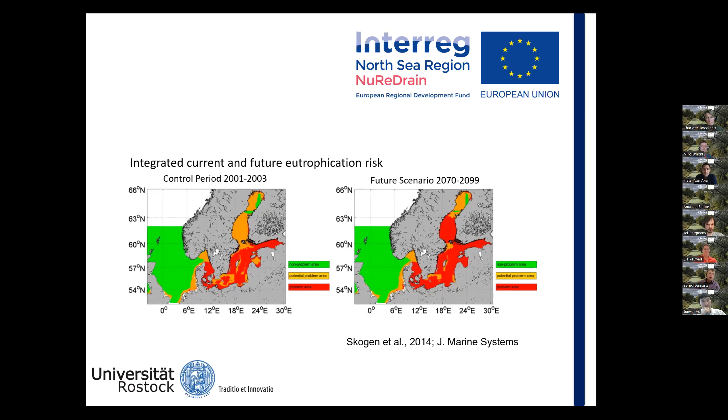And we see the current situation on the left-hand side and the future situation on the right-hand side. And for the Baltic Sea, it is very evident that we really have a huge problem throughout the Baltic Sea. And it seems that the North Sea is entirely green, so no problem, but that is not true. If we are looking along the southeastern continental coast of the North Sea, we can see it is also affected. And of course, the coastal waters are affected because the rivers bring the nutrients from the land to the oceans.

And behind this eutrophication risk is, of course, the nutrient input. We are looking here at nitrogen and phosphorus. So we have the same figure here for the North Sea coast, and we can see that along the coast we have higher concentrations of nitrogen that we have seen already in the other slide somehow.

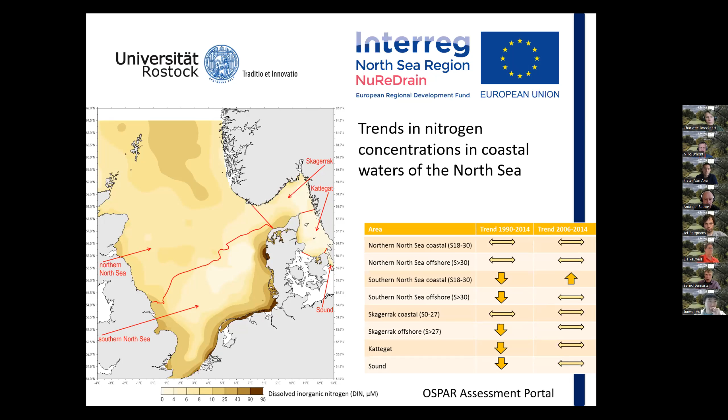Now, what is the reason that these nutrients are transported with our rivers to the coastal seas? It is, of course, the agriculture. Agriculture is here the main player. And this figure shows us the gross nitrogen balance in Europe by country. So what does that mean? What does nitrogen balance mean? It actually means the surplus of nitrogen we are applying to our agricultural fields, surplus meaning more than the plants can take for their growth. So balance is a nice word for surplus, actually.

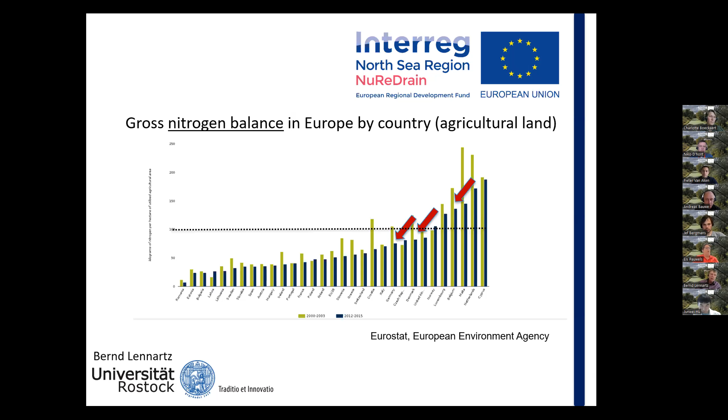And if we are concentrating here on the three countries that are actually participating in the NuReDrain project, we can see, yes, there has been somehow an improvement in this surplus, but we are still, taking the average of these three countries, in the range of 100 kilograms nitrogen per hectare and year surplus. And that is actually one of the major problems.

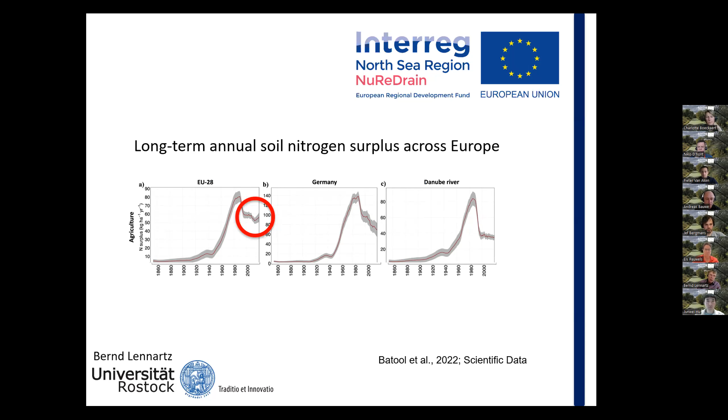The temporal development of, again, nitrogen can be seen here. Again, it's the nitrogen surplus. And we are looking at the EU member states, and we see there was a peak of the surplus, and then there was an improvement, but it seems that now we have reached a certain high plateau of this nitrogen surplus. And that is somehow also reflected in measurements in water. So what we see here is the loading of the land because of agricultural practice.

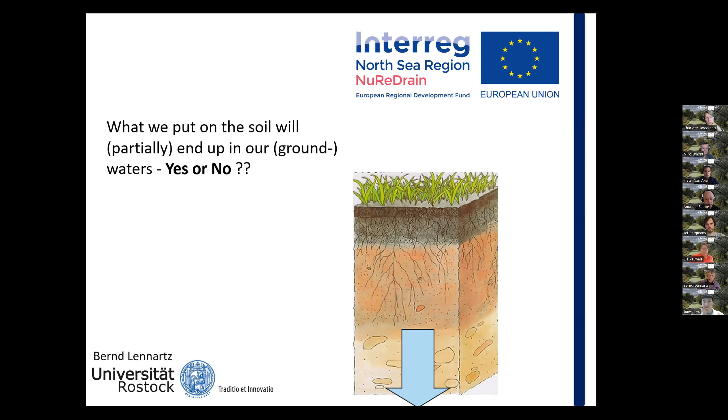So what we have seen is that there is a problem in coastal waters, but also in inland waters, of course. And the question is, will the nitrogen and the phosphorus that we put on our agricultural soils end up in our water? The question is yes or no. And the answer is yes. It's not yes or no, but it is more or less yes and no.

Yes, because, and these are results from a very recent study published in Nature Geoscience, if we relate this nitrogen surplus, here it is called net N input, with the loading of our river system, we can see clearly that there is a linear relationship, meaning the higher the surplus on our agricultural land, the more of this nutrient will pop up in our river system. So it is remarkable to note that more than a quarter of this surplus will actually end up in the rivers. So yes, we can say at least a part of this surplus will end up in water.

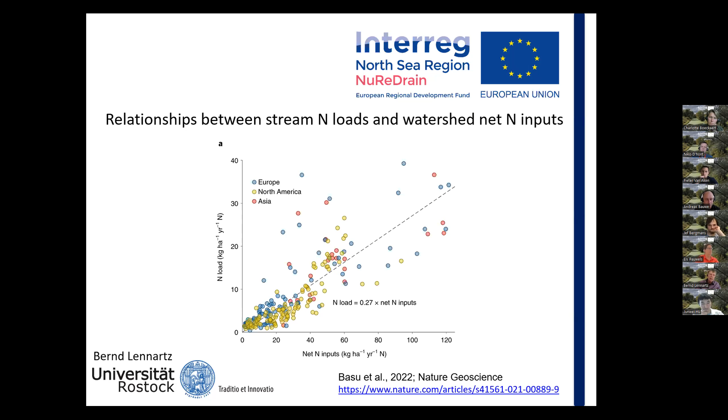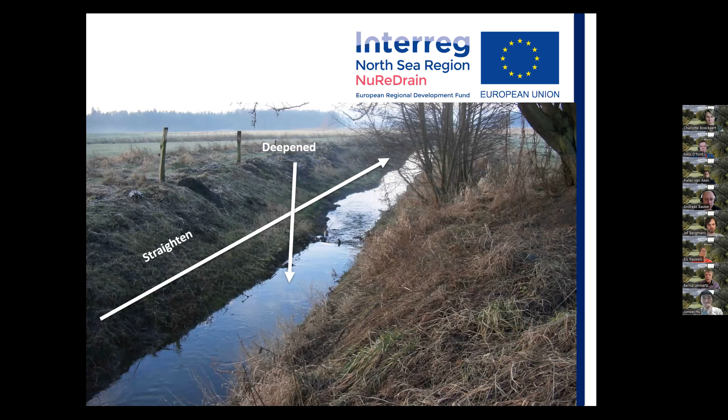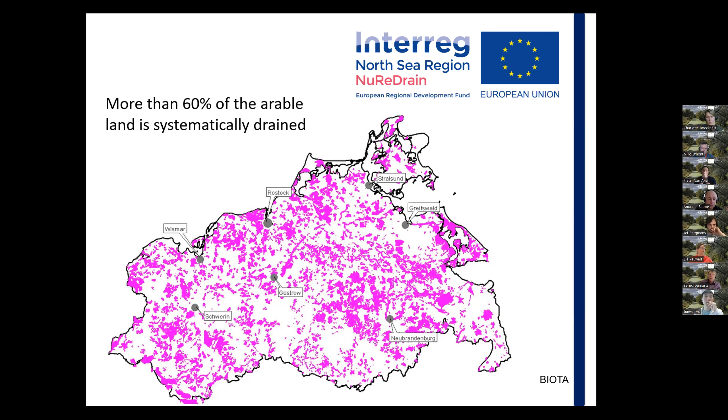And here we see our field site. So this is what we do not see in general. This is the systematic drainage system that is installed at 1 to 1.4 meters depth. And the reason for that is to lower the groundwater table, as indicated here, in order to have heavy machinery on our soil. So that is the whole reason behind it. Now let's look at what we can observe in these areas with artificial drainage, and we are looking here at a single field site.

Now we see one winter period, so this is the rainfall on top, and the blue line indicates the discharge. And especially later in the winter or in early spring, what we can see is that every rainfall event causes a discharge event. That is, of course, something we would expect. And there is a direct reaction. Immediately after rainfall, discharge is generated.

But what we would not expect is the nitrate concentration, also shown. You can see the nitrate concentration is highly dynamic and it follows the discharge curve. And that is not what we would expect, because if there is high discharge, meaning a high volume of water, I would assume that a compound is diluted, but the opposite is true. It comes more the stronger the flux. And that is also something we need to consider, and we will see what the impact of this situation is.

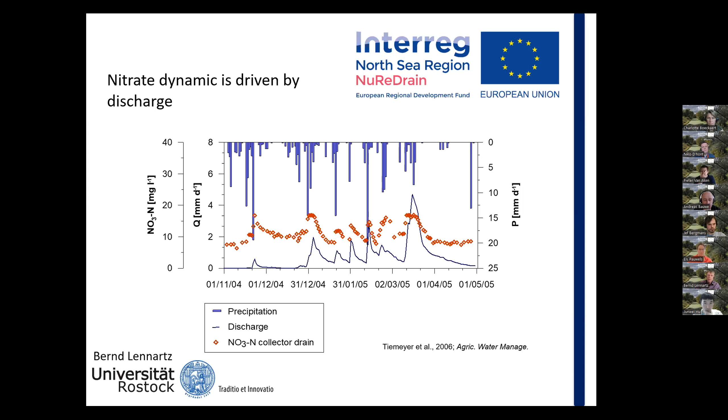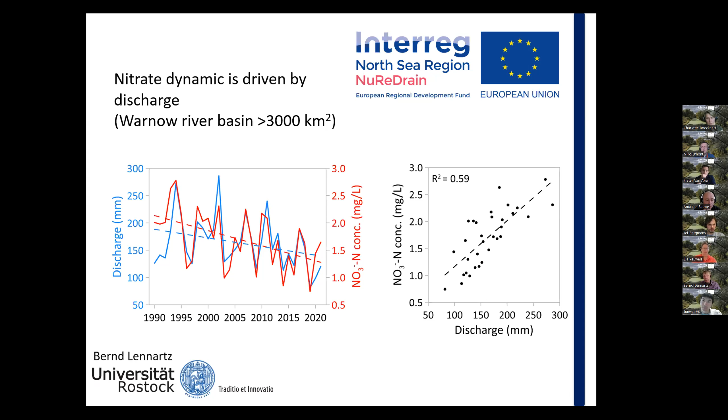We have been observing this for more than 25 years on our field site at a single drain field. Here you can see the annual development at larger scales and also at a very large scale. So that is the river basin of the Warnow River, and the surface area we are looking at is more than 3,000 square kilometers. And you can see that this relation is also true for this river basin. There is a strong correlation between discharge intensity and nitrate concentration. So that is also something we need to look at and consider.

Right, now this is also a very important study because it shows, for the example of the federal state of Mecklenburg-Western Pomerania, what are the dominant pathways for the nutrients. For nitrogen, there is no discussion. It is the artificial drainage system, indicated by the red bar here, which is the dominant pathway. So if we want to do something, let's start at the artificial drainage system.

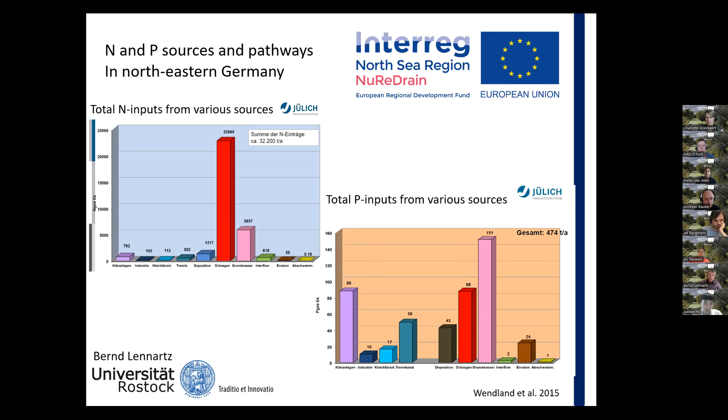Now, climate change, as I mentioned, is also somehow playing into our cards, we can say. We just recently analyzed the data for the Warnow River Basin, and what we found is, yes, there is an increase in mean annual temperature, and more or less no change in rainfall. And if we are looking at the load of the river, we see a decreasing trend in this load, as seen by this red line and the red curve here. But it seems that the only reason behind it is that we have less discharge, because the load is the product of the concentration and the volume flux of water. So if we have less water, we will have a lower nitrogen load.

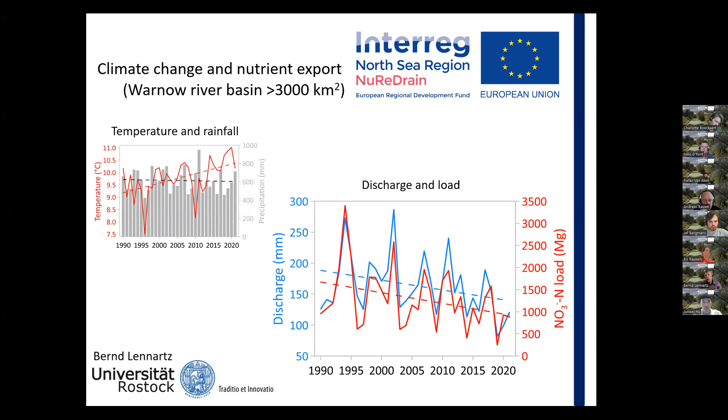So, ladies and gentlemen, what can we do? In a landscape that is artificially drained, we have actually three options. We can lower the input of our nutrients into the system by reducing the surplus. Yes, I think that is something we have to do. We saw the figure. Only if we are reducing the surplus will we have an effect in our water, but that may take a very long time.

On the other hand, we can do two things. We reduce the flux, we reduce the discharge. You may ask, how can we reduce the discharge? Well, in a landscape that is artificially drained, we have access to these pipes, and we can have regulating units, and thereby we can regulate the discharge. In times of global climate change and high temperatures, that will also come into focus, because we can hold the water in our landscapes if we are regulating these drainage systems.

And the third option is we lower the concentration of the compound we are looking at. So numbers 2 and 3 are so-called end-of-pipe solutions. And these end-of-pipe solutions have been developed in the NuReDrain project, and this is what we are going to hear about. And this is something we need to do if we want to have an instant effect.

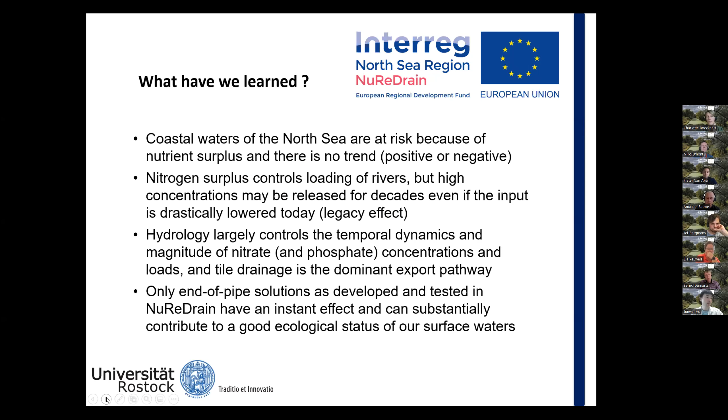And now we give the word to Pieter van Aken from KU Leuven. Thank you, Bernd. Hello, everybody. I am indeed Pieter van Aken from the Process and Environmental Technology Lab at KU Leuven. And I have the honor to introduce you into the different end-of-pipe technologies we applied in the NuReDrain project to remove nitrates from drainage water.

And before we start looking at those technologies or those systems, I want to first highlight a little bit about the different water flows that we need to consider. We had a nice introduction of Bernd about the tile drained fields or the artificial drainage systems. That's of course the first type of water, the drainage water, in which the concentrations vary between 12 and 50 milligrams nitrogen per liter.

We have most of the time variable flow rates, and sometimes even really high flow rates that we need to treat. And because there's a link with the precipitation, of course, it's only during the winter. So from November until April, the water will come out of the drainage system. So that's only a part of the year that we need to treat that water.

Also, because of the winter conditions, the water temperature will be relatively low. We measured minimum water temperatures of around 5 degrees, sometimes a little bit higher, 6-7 degrees. But even then, our technologies need to work, of course. And mostly we are at remote places, so electricity is not always available, which we need to take into account if we need to design a system to treat the water.

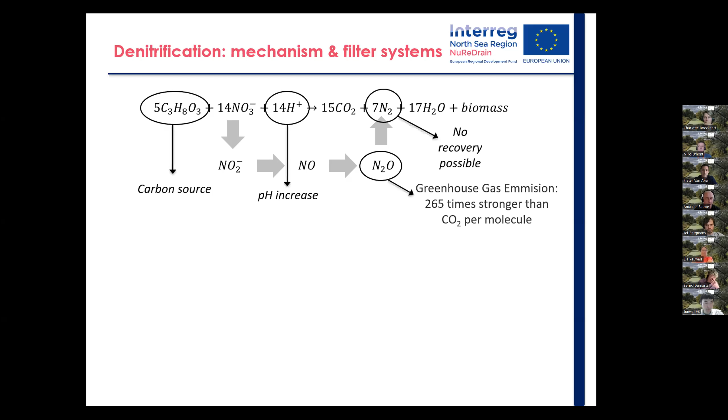Which are the different technologies that we have applied? First of all, a constructed wetland. The second is a wood chip bioreactor, and at last a moving bed biofilm reactor. For the constructed wetland and the wood chip bioreactor, at the beginning of the project there was already some experience in Denmark. They showed removal efficiencies for constructed wetland around 25%, for wood chip bioreactor around 50%. And of course, you want to make sure that we can reach those removal efficiencies or even improve them. The moving bed biofilm reactor was a new system that we developed specifically for areas where there's not a lot of space available to install such big systems like a constructed wetland or a wood chip bioreactor. For those footprints, I will give some numbers later in the presentation.

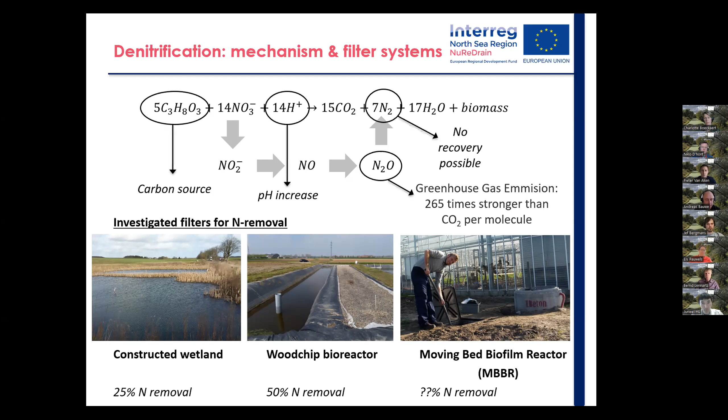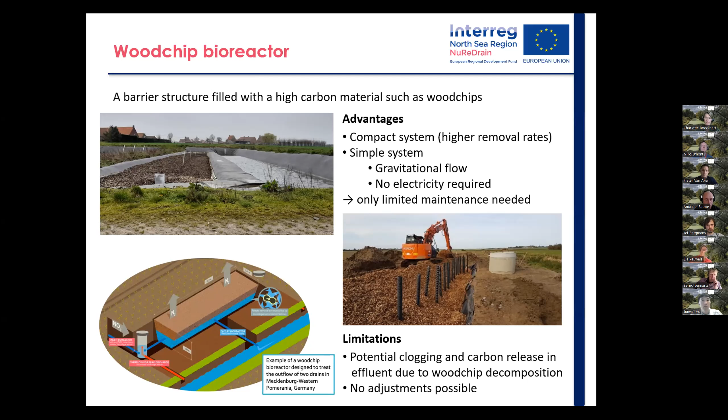If we look at a wood chip bioreactor, it's a barrier structure, and it's used to lower the footprint. We use wood chips, which will decompose and can be used as carbon source. So that's the advantage: we can reach higher removal rates, and therefore the footprint is much lower. But it still is a really simple system. And what are the limitations? Sometimes because of the decomposition of the wood chips, clogging can occur. And also there is a little bit of carbon release, so you see a slightly higher carbon concentration in the effluent.

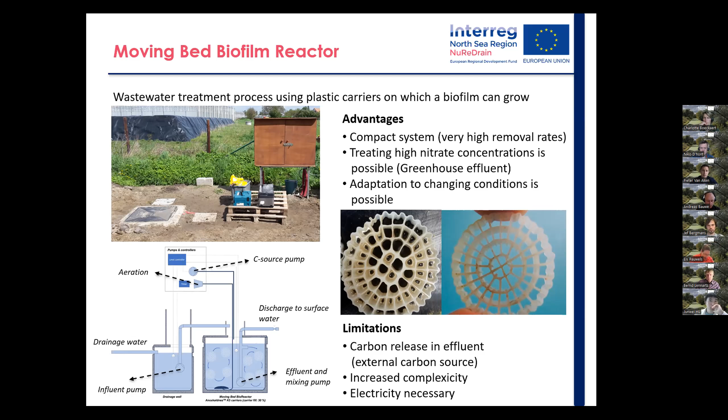Which are the limitations? We also have some carbon release in the effluent because we use an external carbon source. There is an increase of complexity, of course, as it's an engineered system, and we also need electricity for the pumps and the control and everything.

Which lessons have we learned from all the field cases? First, from the development of the moving bed biofilm reactor, we were able to keep higher temperatures in the underground systems compared to the systems above ground, and that's most important in the winter. In the above ground systems, sometimes we reach temperatures of 2 or 3 degrees, which is too low for denitrification. So there it was really difficult to have some activity. So we prefer to go underground.

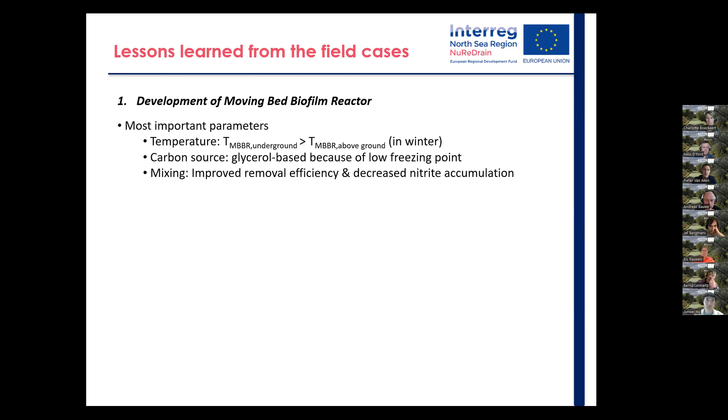For the operating costs, I show you some data from a system in Belgium. It's an underground MBBR of 15 cubic meters, and we followed it up for 3 drainage seasons. You see that the total treated drainage water, so the flow rate per day, is quite the same. It's a little bit lower in the last year, but it's quite the same, and we were able to remove quite the same amount of nitrogen.

But when we look at the nitrogen efficiency, we see an increase every year, despite the fact that we lowered the amount of carbon source that we added. So the first year, we added 8.2 kilograms carbon per kilogram of nitrogen removed, but we lowered it by almost 50%. And we didn't see anything happening on the removal efficiency, and it even increased.

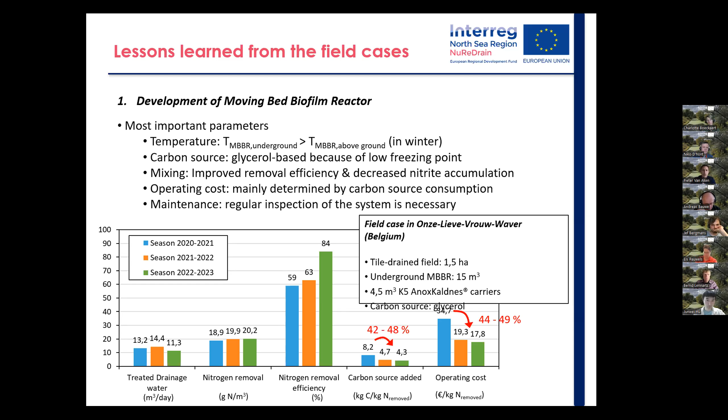So that's of course important, that we see some changes during the years, and our biofilm is developing, becoming more mature, so able to remove more nitrogen, even at lower amounts of carbon source, and that has a huge effect on the operating costs. So it's also almost 50% lowering of the operating costs. And also for maintenance, we noticed that regular inspection is necessary. So when we make a cost calculation, we consider the labor, or the amount of hours that's necessary.

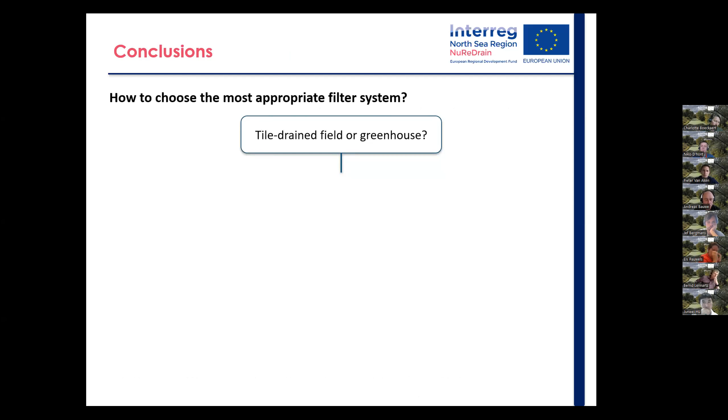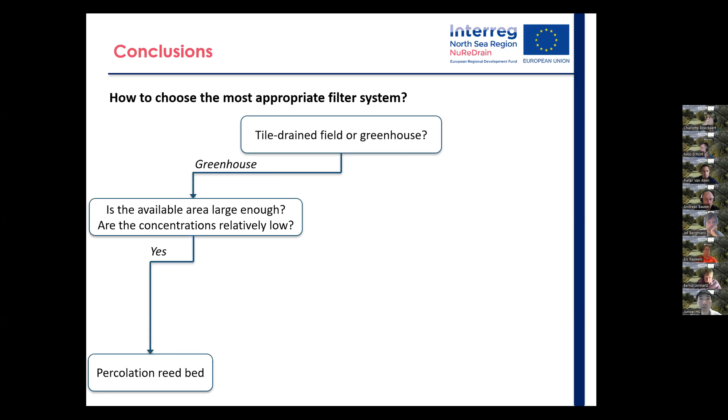To come to a conclusion, I try to come up with a decision tree. You don't need to take it absolutely, but it gives a direction when to use which system in which situation. First of all, is it a tile drained field or is it a greenhouse? If you go for a greenhouse, is the available area large enough, or are the concentrations relatively low? Then a percolation reed bed can of course be used. I don't show any results of that, but we also investigated that in the NuReDrain project. So we have some results available. If it's not, we will advise you to use an MBBR.

If it's a tile drained field and you have quite a lot of area available, you can go for a constructed wetland or a wood chip bioreactor. Is there a restriction of the amount of area available? Then consider to go off-grid or not. Is it possible to use electricity or not? If no electricity is available, if you're at a remote location, use the wood chip bioreactor. Can you use electricity? Then go for an MBBR, of course.

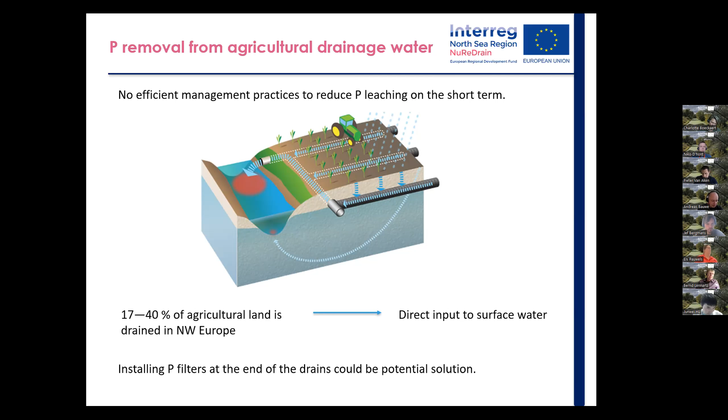So, for this purpose, we developed a filter to adsorb the phosphorus. In the lab, we tested different filter materials, and we found the iron coated sand showed the highest capacity of removing phosphorus. This is because the iron could form a chemical bond with phosphorus. And the iron coated sand is a waste product from the water industry. So it also caused no other contaminations.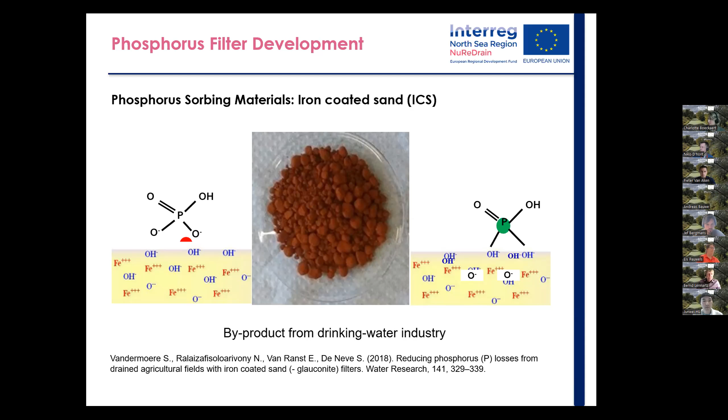So using this material, we developed a phosphorus filter. The drainage water goes inside the filter box, first goes down and then moves upwards, has contact with the iron coated sand and then is discharged. When the flow is higher than the capacity of the filter box, the water could be directly discharged.

We installed several of these prototype filter boxes in the field, and we evaluated the performance for the long term. Let's have a look at the results. So at the site of Zethem, we have 3 filters there, and now I will show 2 of them. One filter has been installed for 5 years. From this table, we see the phosphorus removal efficiency.

The y-axis indicates the volume-weighted phosphorus concentration, and the dark blue bar indicates the total phosphorus at the inlet, and the light blue bar indicates the total phosphorus at the outlet. And the dark green indicates the dissolved reactive phosphorus at the inlet, and the light green indicates the dissolved reactive phosphorus at the outlet.

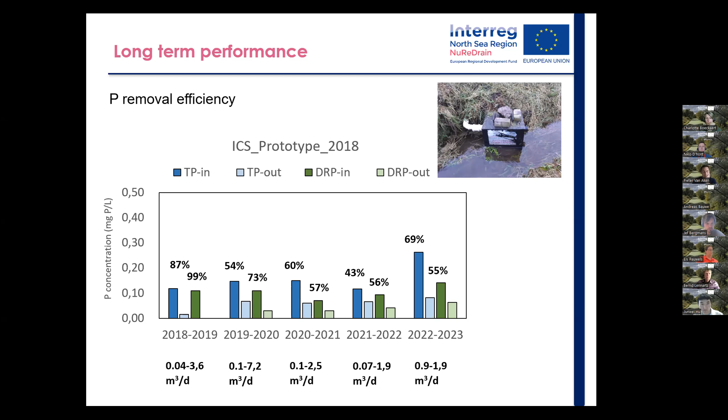And this is also the case for the other filter we tested for 4 years, also at Zethem. So in the first year, almost all the phosphate was removed, and still in the 5th and the 4th year, more than 50% of the phosphate can be removed.

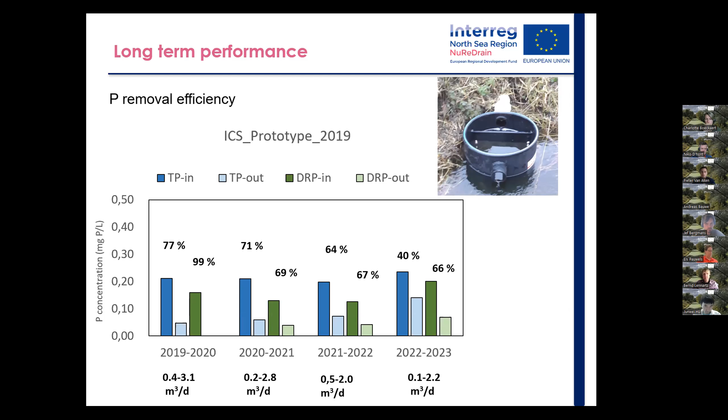So generally, we can say if the flow is below 0.2 cubic meters per hour, which is 4.8 cubic meters per day, we could achieve a relatively high phosphorus efficiency, around 50%. Currently, the filter box is placed in the ditch, but ideally the ditch should not be obstructed. So we further tested burying the filter box at the edge of the field inside the soil. And we did 2 of them. Both are at that site, and the installation proved to be relatively easy.

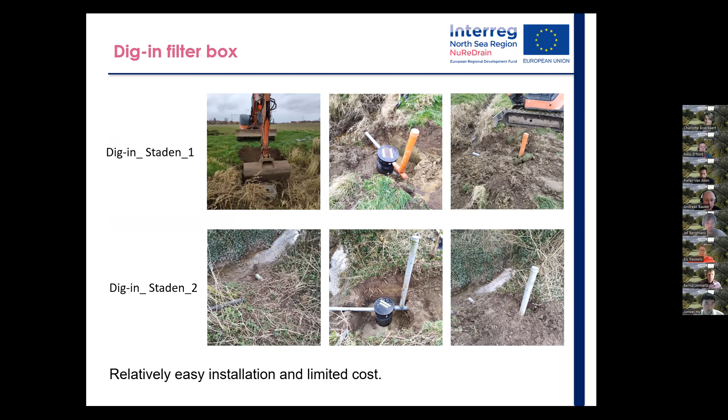How about the performance? Because in the first year, both filters showed very low phosphorus concentration, we did not show the data. At one of the filters in the second year, the phosphorus concentration was high, and we only looked at data with a flow rate lower than 4.8 cubic meters per day. At this flow rate, the phosphorus filter showed around 50% removal efficiency for the dissolved reactive phosphorus.

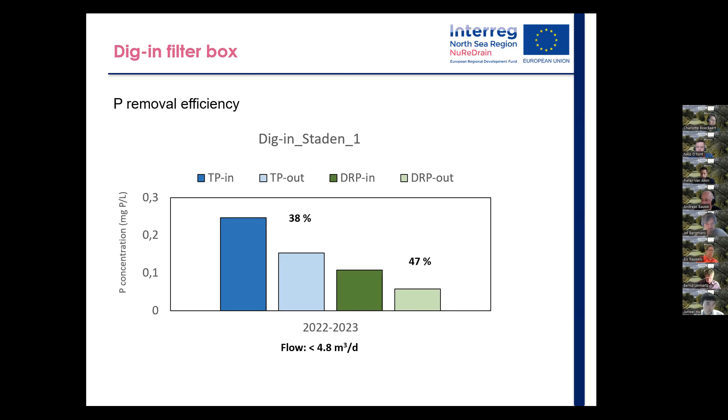As we can see from the previous graph about the flow and the removal efficiency, our filter cannot treat bigger volumes of drainage water. So to achieve this, we designed another upscaled filter box. This filter box has two cylinder elements. In between them, 140 liters of iron coated sand was filled. And this filter element is placed in a cubic container.

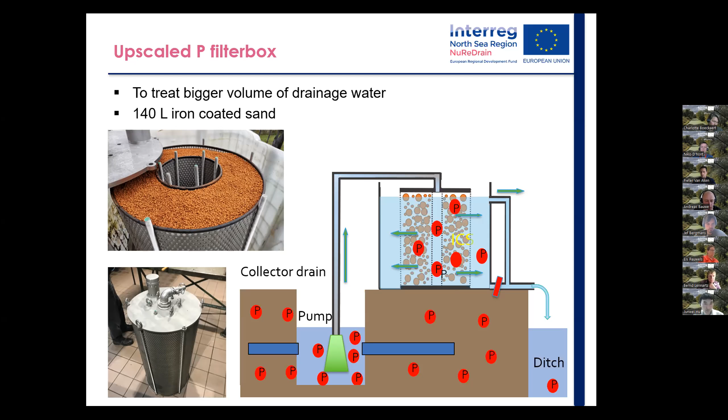How does this filter work? First, the water is pumped to the center of the filter elements, and then it goes from inside to outside, through the iron coated sand, enters the cubic container, and then is discharged to the ditch. We have two of these upscaled filter boxes installed, one at a collector drain at the Belgian coast in Middelkerke, and the other one at the open pond of Inagro. We tested these filters for 2 drainage seasons.

The first year at Inagro, the phosphorus concentration was low, but the second year, the phosphorus concentration was higher, and we managed to have a good result. So again, the dark blue is the total phosphorus at the inlet, the light blue is the total phosphorus at the outlet, the dark green is the dissolved reactive phosphorus at the inlet, the light green is the dissolved reactive phosphorus at the outlet, and the y-axis is the phosphorus concentration.

So at the average flow of 8.8 cubic meters per day, we achieved 75% dissolved reactive phosphorus removal efficiency. However, we constantly had problems with the open pond water. It's a clogging problem. So to prevent this problem, we installed a pre-filter. But still, we need frequent maintenance to ensure optimal water flow.

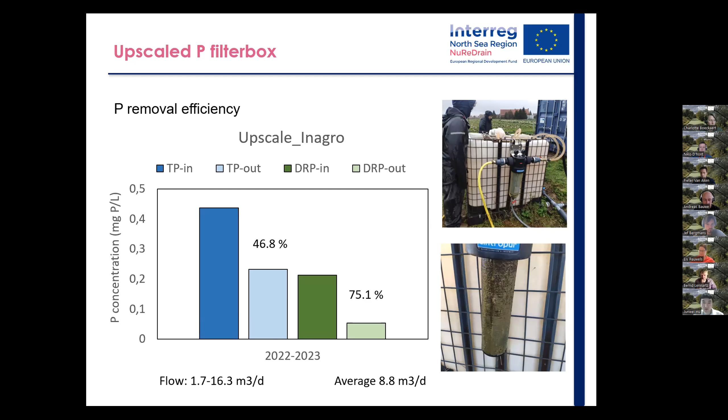However, the upscaled filter does not work so well at Middelkerke. In the first year, the phosphorus removal efficiency was around 20%. We further improved this filter to reduce the flow and to make sure all the elements are used. But still, the phosphorus removal efficiency did not increase in the second drainage season. We assume this could be due to the water properties, but it still needs to be confirmed by further investigation.

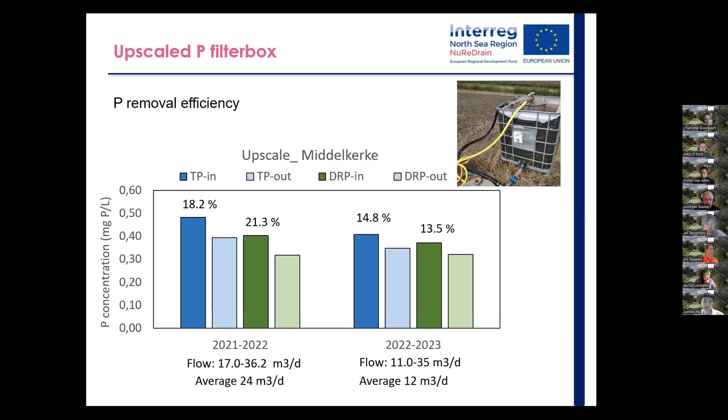In the end, we compared the cost of these two types of filter box. The small filter box is based on the 3 filters at Zetterham, tested for 3 to 5 years. On average, every year 150 cubic meters of water is treated, at an average phosphorus concentration of 0.14 ppm, with an average phosphorus removal efficiency of 72%. So every year, 14.3 grams of phosphorus is removed, and the cost for 1 kilo of phosphorus removed is 1,750 euro.

The upscaled filter box is calculated based on the upscaled filter at Middelkerke, tested for 1 year. At an average flow rate of 8.8 cubic meters per day within a drainage season of 4 months, we estimate 1,000 cubic meters of water being treated, and with an incoming phosphorus concentration of 0.21 ppm and an average phosphorus removal efficiency of 75%, we estimate 166 grams of phosphorus was absorbed. With 1 kilo of phosphorus removed, it costs 1,500 euro.

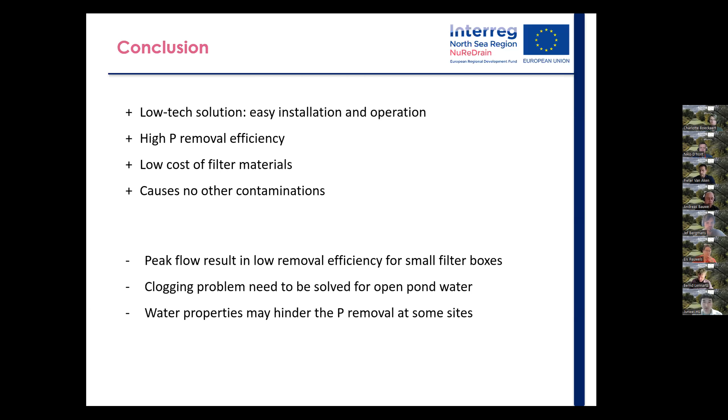That's all of my presentation. Thank you for listening. Okay, thank you, Hunwei. There is no question in between Hunwei's presentation and mine, so I continue.

My name is Els Pauwels. I'm working at the ornamental plant research here in Belgium, in Destelbergen. We learned a lot from Peter about the MBBR and N filters, and we learned already some things about the P filter from Hunwei. So what we thought is: can we install 2-in-1 filters, P and N filters together, to have a total removal of N and P? The N filters can be constructed wetlands, cocos chips filters, and MBBR, and for the P filters there were at first several possible filter materials, and the NuReDrain project helped us to find which filter is the best for which condition.

Something that is very important for growers is that they have to keep reusing as much water as possible. The water that we are treating, certainly for greenhouse growers, is only the water that is not reused, because reuse is a priority. You can save fertilizer use by 30%. And water is so important now that reusing is really a priority. But if you then have wastewater, and in greenhouses that's mostly max 5% of the total amount of water, then we have filters constructed that can lower the N and P concentrations.

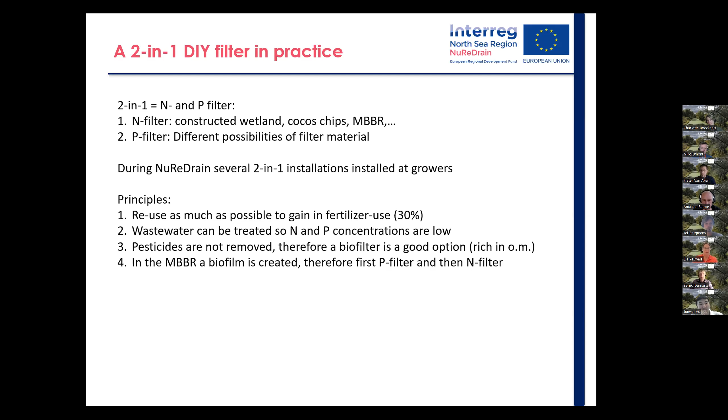So we have chosen the ICS grains, as Hunwei already said, but for that we did a lot of research. It was a team of Peter and Nico who did a lot of research on many different filter materials. Also at VITO, they tested a lot of filter materials to know which material can be used in which condition. Finally we ended up with 11 filter materials we researched, and then we narrowed them down to 4 good materials that can be used.

But indeed, ICS is very easy to use because it is a waste product from drinking water production, and it can really absorb P very well. It has the disadvantage that it desorbs less well than other materials, but it absorbs P very well, and therefore you can have a high conductivity in the filters. And until now it's sufficiently available.

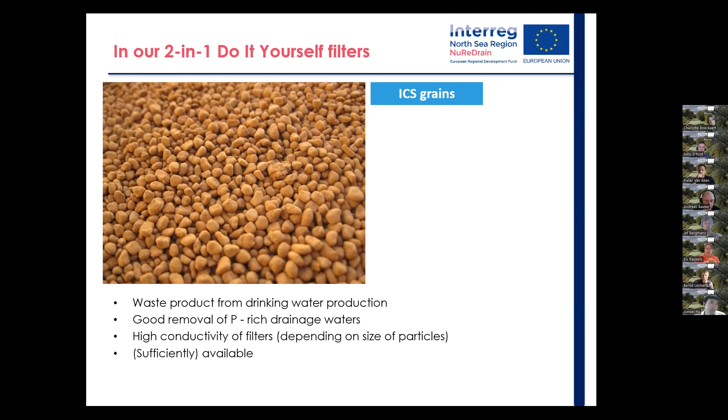But we tested also at PCS other materials. We have also the pellets. That's pellets that are made from the sludge, also from the drinking water company. But yeah, that's an extra step that they have to do with the sludge. So currently it's not available anymore, but you will see in the results that it is certainly as good as the ICS grains are. Good material, but a bit of a problem with the availability.

And then we have other materials like Vito A and Vito B that are also materials based on iron-coated sand, the Vito B on iron, and on aluminium, the Vito A. Materials that work very well, we will see it. And then later in the project, we also did tests with the regenerated ICS, which later on Jef will talk about. And you have seen the material from Hunwei, which was tested in the field.

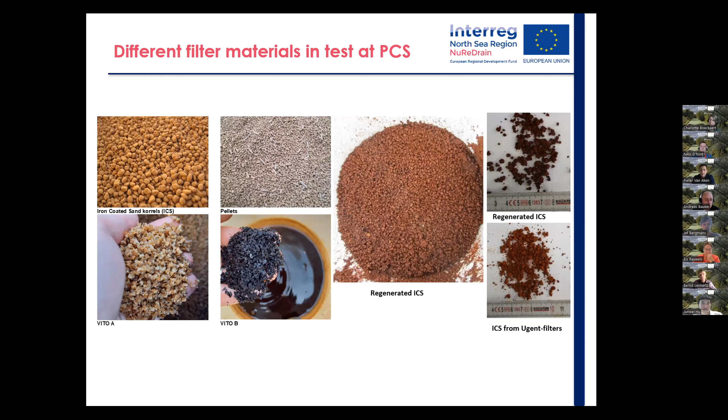For greenhouse water, we have, of course, the advantage. Yeah, it's a high load, then you have pretty good efficiency. And we don't have any problem. It's clean water from the greenhouses. We don't have any problem with clogging and so on. So these are advantages to have such a good result.

That is something that we always see in the beginning of the season. It's something funny, or not funny, but something that we see, that the P is going deeper into the grains, and there are new possibilities to absorb at the outside of the grain. So even if they were saturated last year and you let them rest some time, when you again start up your filter systems, they work again in the beginning. But of course, they are again fast saturated.

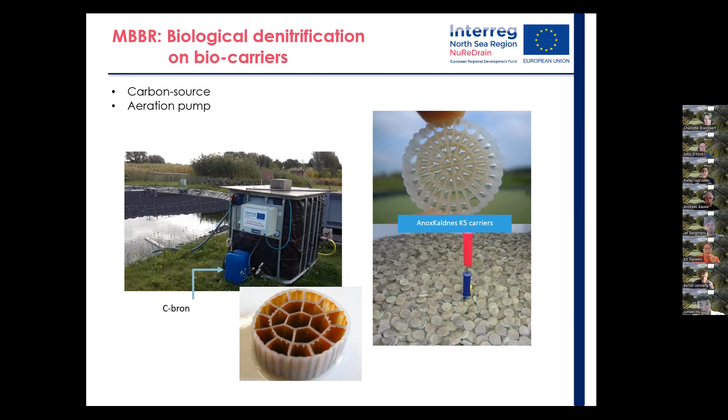So, and then we have a 2-in-1 filter. We have a P filter and a second filter. We chose for the MBBR because that's very compact and easy. Like Peter already told you, we need a carbon source for this and an aeration pump, and the carriers, but that's almost everything. So it's really easy to install. And therefore we have a demo unit that we show to the growers. And we have also demo moments where we show how it works. And we made a manual, which is available in Dutch and in English, of how you can make your own MBBR. So it's simple and compact.

How much water can we process? We process up to 3 cubic meters every day. It's robust, cheap, and there's no recovery. The carbon source, well, 5 to 8%, yes, sometimes, but on the other side, we needed to go up to 15%. So it really depends on the water that you are treating, how much carbon you have to add. So that's something that during use you still have to adapt. And the P filter always works very well in winter, but the N filter, in winter times when it's freezing, can be difficult in operation. The efficiency can be lower then.

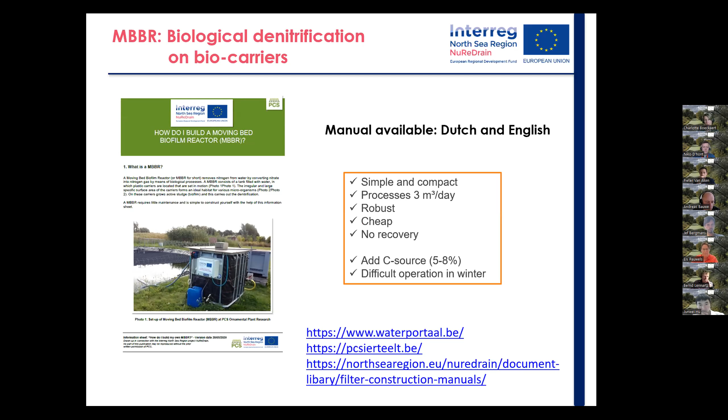So we tested different 2-in-1 filters in practice, and this is the grower that you saw in the beginning, where the winner of the quiz will receive the plants of, and he was one of the really first growers to be interested in these P and N filters.

Why specific for this grower? Because he grows potted plants that are really susceptible to a particular bacteria, and therefore reusing his water is sometimes difficult. Sometimes he has to discard his water, and he can do that on his grassland, but he can only put certain amounts of water on that grassland. And if the N and P concentration of the water is lower, then he can add more water per square meter. So first he had only a P filter, but later on also an N filter, so he can put more water per square meter.

He has a floristry with potted plants, and he has 750 cubic meters of drain water a year. At the start of the project, we first have the 2 P filters and then the MBBR filter. So also there we treat 3 cubic meters every day. And you have also an aeration pump in the MBBR, which is running 20 times a day, only 1 minute.

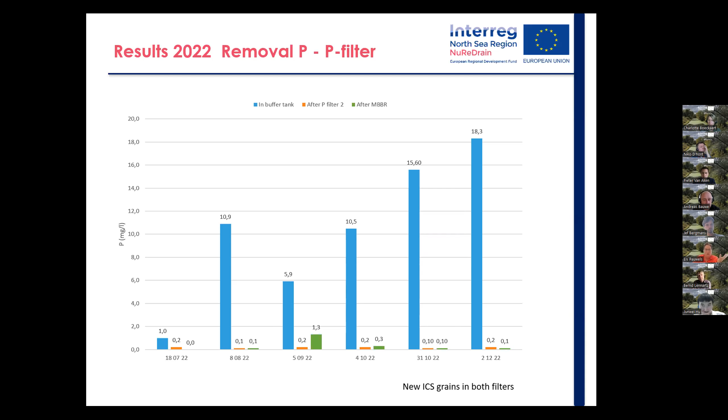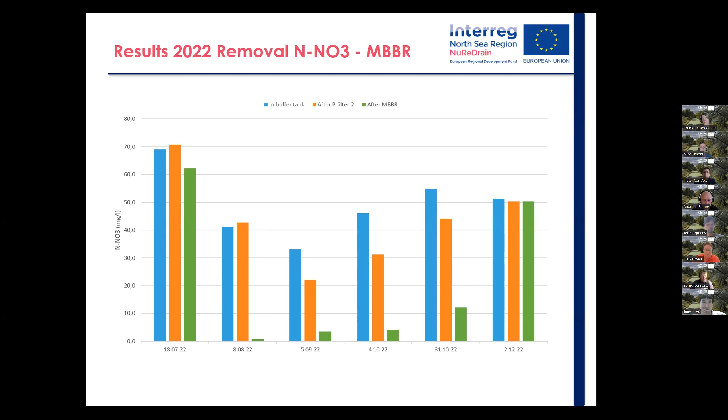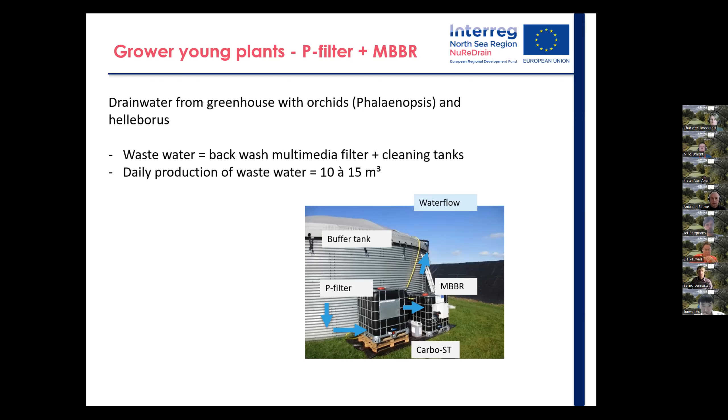And then the most recent filter that we installed is also drain water from a greenhouse with azalea. Also here, there is a UV filter to reuse all the water, but the backwash water can be pretty much. Here, for one backwash, it's 1.5 cubic meters. And if you have more than one backwash, for instance, 2 backwashes each day, then you can treat all this water with the N and P filter to be able to lower the concentrations.

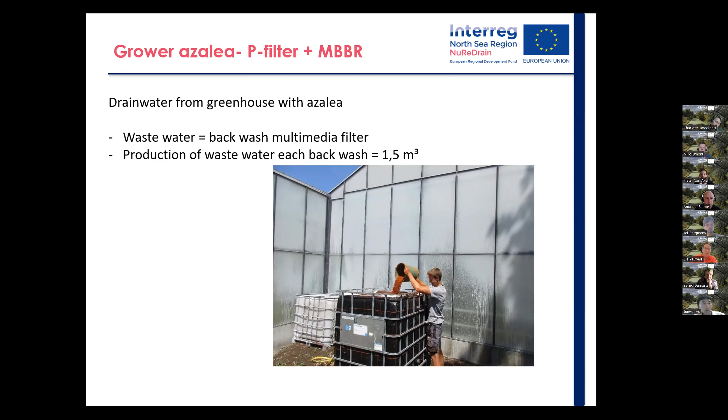So here you can see the total installation. What is the cost of a two-in-one filter? Well, let's say that the cost for the P filter is mainly pumps, the cubitainer, and nowadays, before we just received the ICS from the drinking water company, but nowadays you buy it from another company and you have to buy the ICS grains. So it comes now up to 1,000 to 1,500 euros for a P filter.

And for the MBBR, which is a little bit more complex, and you need energy there, we say it is up to 2,000, 2,500 euros. So in total, a two-in-one filter system is 3,500 up to 4,000 euros that it costs. But efficiency, certainly for the P filters here, we have really efficiency for greenhouse water, 80 to even almost 100%. The MBBR is more around 70% efficiency that we obtained.

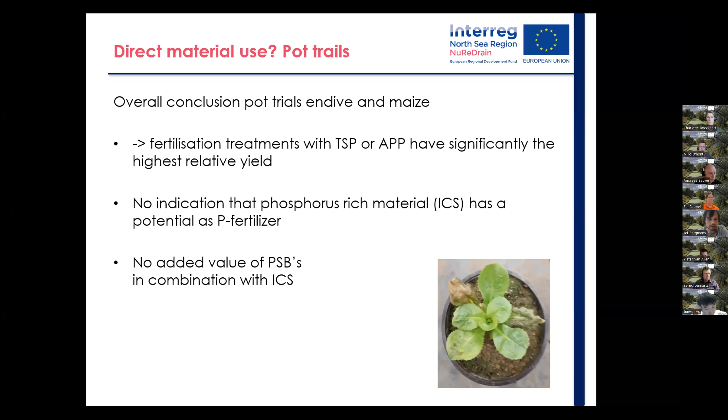And even if we use phosphorus solubilizing bacteria in combination with this loaded iron-coated sand, we still do not achieve the same as when we add a phosphate nutrient. So this route was abandoned because of not very promising results.

The other route that we were looking at then is to at least regenerate the sorbents. In literature, you see two routes to recover the phosphorus from the sorbents: there is the acidic route and an alkaline route. The difference there is mainly that in the acidic route you indeed recover more phosphorus than in the alkaline route, but the issue is that you also start dissolving a lot of the actual sorbent.

And if you look at the capacities of these sorbents, you see that only a few grams of phosphate is actually sorbed on a kilogram of sorbent. So we decided, and it's also economically more interesting, to focus on the filter material recovery, to make sure that the filter material is not completely destroyed, and to have a more selective removal.

With the alkaline route, we basically replace the sorbed phosphorus by hydroxyl groups on the surface of the iron hydroxides or oxides. There is already some literature available on this, but most literature works on very small scale experiments and tests performed on artificially loaded sorbents. We had the availability of sorbents that came from the field, and that was more interesting because there you will also see more loading on the inside of the iron-coated sand.

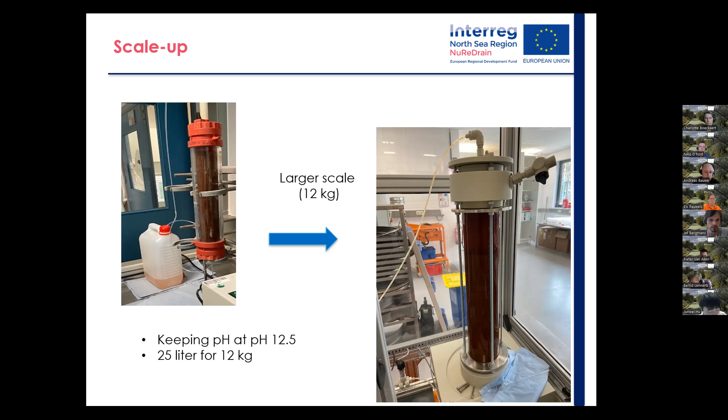Looking back at our results, we see that we can desorb phosphorus from the saturated ICS grains, and that the type of alkaline solution does not have a big influence. We used both potassium hydroxide and sodium hydroxide in the beginning, then went from sodium hydroxide to potassium hydroxide for the nutrients, and we can keep on recirculating the alkaline solution. We basically recirculate the same solution over the column and keep the pH at 12.5, adding a little bit of potassium hydroxide the longer the experiment runs.

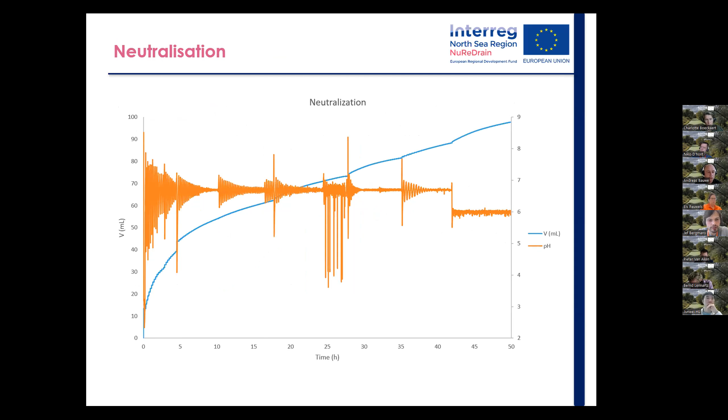We then do the opposite: afterwards, we add an acid and bring the sorbents back to neutral pH. With that, we managed to desorb 8 to 9 grams of P per kilogram of sorbent, which is basically what was sorbed before. So almost all P that was sorbed we can desorb in this process. And these are the sorbents after desorption that were sent back to PCS to reuse in a different setup.

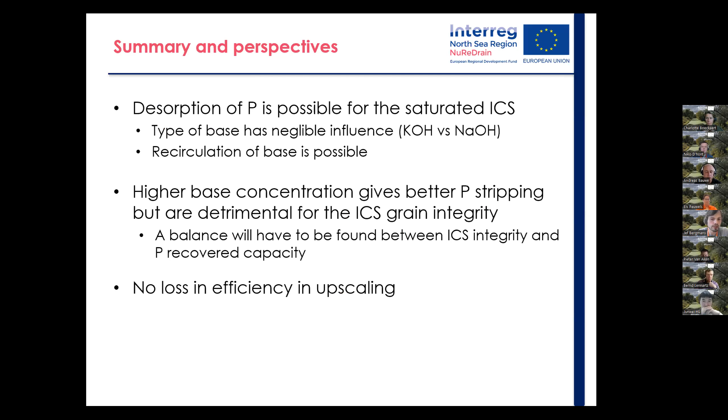If we use a higher alkaline concentration, we of course remove more P. But if we use too much and go too high in pH, we also start dissolving more iron from the surface. So we cannot go that high in pH, to make sure that the integrity of the sorbents is still there and that we can keep on reusing them. Ideally, we would have a few sorption-desorption cycles, and then it's of course important that the integrity stays stable.

Now, what we also did is we looked in the technical economical assessment what is more economically interesting, to just buy new sorbents and landfill the old ones, or to desorb them. So we assumed that there was already a sorption setup available. We assumed that the loaded sorbents would then be landfilled. That's at the moment we think the only option. Of course, if for loaded ICS or loaded other iron oxide-based sorbents you find a better solution besides landfilling, then that cost will disappear.

And then for the desorption case, you have to invest, of course, in a desorption setup. You can use the same setup that you use for the sorption column if you have used material that can withstand a high pH. If you use steel in your sorption setup, then the high pHs that we would use would cause rust. So you ideally work with material like polypropylene or PTFE and so on. You also use a peristaltic pump or a chemical pump that can again withstand the high pH. And you need a steering system, basically a pH meter and a feedback system that says, if your pH drops too low, to add extra potassium hydroxide.

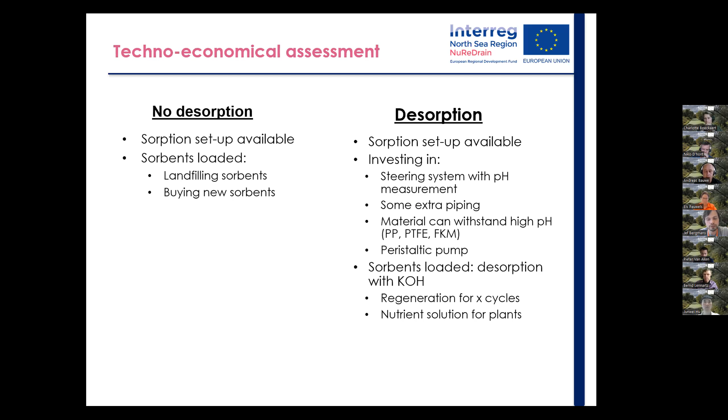Then you also need to, of course, pay for the potassium hydroxide and the sulfuric acid. And the nutrient solution that we get could be used for plants because it basically contains potassium, sulfates, and phosphates. So that's all useful nutrients. We did not take into account, however, the price of this nutrient solution. So we just assume you can use it, but we didn't give a positive value to this solution yet.

Okay, thank you, Jeff. Then we move on to our last quiz question. So if you still want to beat Marianne, be quick and be correct. It's a question asked by Marijke Dirks from PCS. I'm Marijke Dirks from PCS Ornamental Plant Research. We test two-in-one filters to remove nitrogen and phosphorus from greenhouse effluent. I have a question for you. The cost for nutrient removal depends on the concentration of nutrients in the water and the volume of water to be treated. What is the average cost, investment and operation, for a moving bed bioreactor?

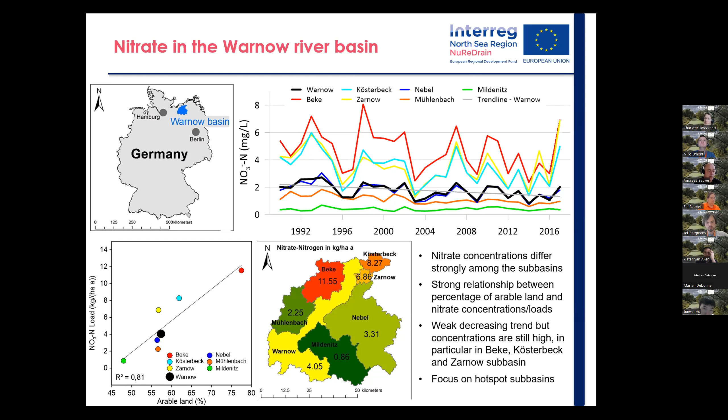What does that mean? Also, we have in the last 30 years a weak decreasing trend. But if we want to install end-of-pipe solutions, which we have heard a lot about today, then we should focus on hotspot subbasins, which is in our case in the Warnow River Basin, the Beke subcatchment.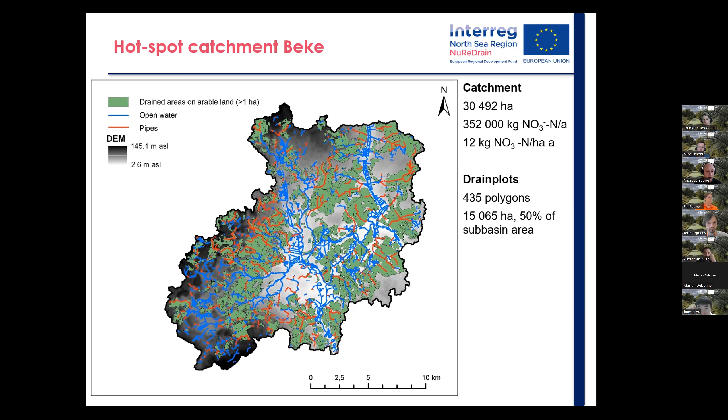So what options do we have to reduce the nitrate load with the help of technical solutions? It was already mentioned that we could install, for instance, moving bed bioreactors, or wood chip filters, or another option would be the installation of constructed wetlands. We have also heard a lot about the investment and operational costs of these different systems, and about the different efficiency of these systems.

So the main study questions here were, what is the nitrate removal potential if we would install these filters at a catchment scale, and what are the annual costs? To answer this question, we developed a cost evaluation tool, which I want to introduce right now, and I want to give you some examples of how you could work with the tool or what the results could be.

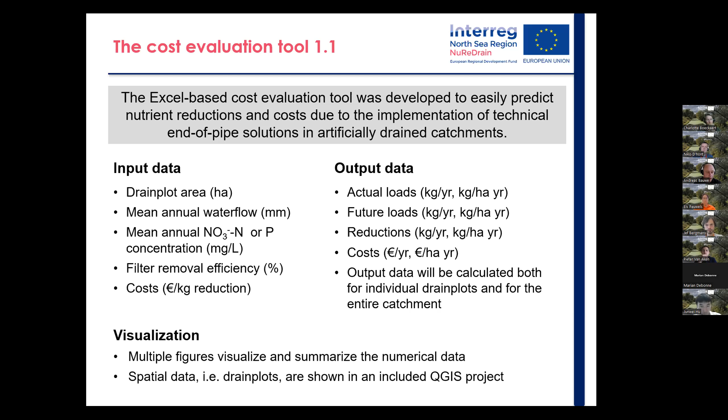Here you see a screenshot of this tool. We developed 3 different settings, and this is the so-called advanced settings, where you can define the area of the drain plots where you would like to install MBBRs or wood chip filters or surface flow constructed wetlands.

You can define a minimum annual nitrate concentration in which filters should be installed, and also you can define the costs per kilogram solute reduction for the 3 different systems, and also you can define, here it is named the reduction target, which is in fact the performance of the filter. So, and here you see some different figures, and here you see the start of the tabular data.

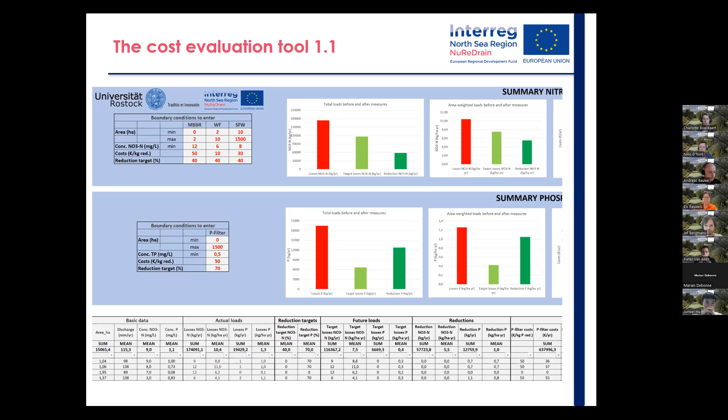So I want to come to a first example, which is related to the basic settings, if you want to start to play a little bit with the tool. So first, we should define the boundary conditions. As I already mentioned, in the Beke catchment, we have 435 drain plots, and we assume that they have the same discharge and nitrate concentrations.

And Bernd already mentioned our experimental field site, where we have long-term data, and the average data here is 168 millimeters per year in discharge and nitrate nitrogen concentrations of 9.6 milligrams per liter. So let's assume that the drain plots in the Beke catchment all have the same discharge and the same nitrate nitrogen concentrations. Filters will be installed at all 435 drain plots, but the performance and the costs per kilogram nitrogen reduction vary.

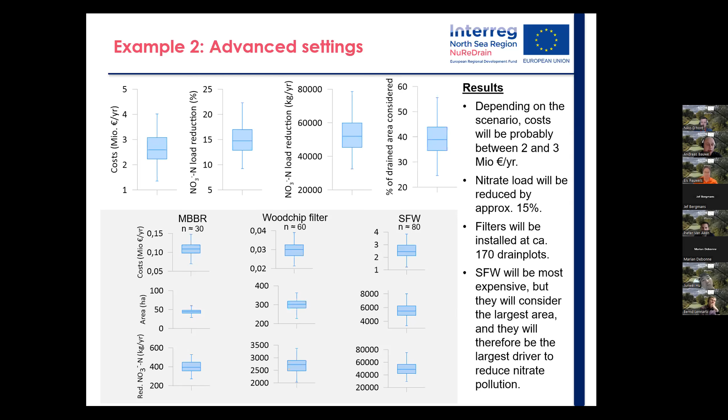And here you see the results. Depending on the scenario, in the left box plots, the costs will probably be between 2 and 3 million euro per year for the entire catchment of the Beke. And what is interesting, the nitrate load will be reduced by approximately 15%. And also according to these scenarios, the filters will be installed at circa 170 drain plots, 30 MBBRs, 60 wood chip filters, and 80 surface flow constructed wetlands.

When we look at the lower box plots here in this figure, we can say that the surface flow constructed wetlands will be most expensive. You see this here. Here you see the costs in million euro per year. Wetlands will be most expensive, but they will cover the largest area, which you can see here, and they will therefore be the largest driver to reduce the nitrate pollution in this scenario.

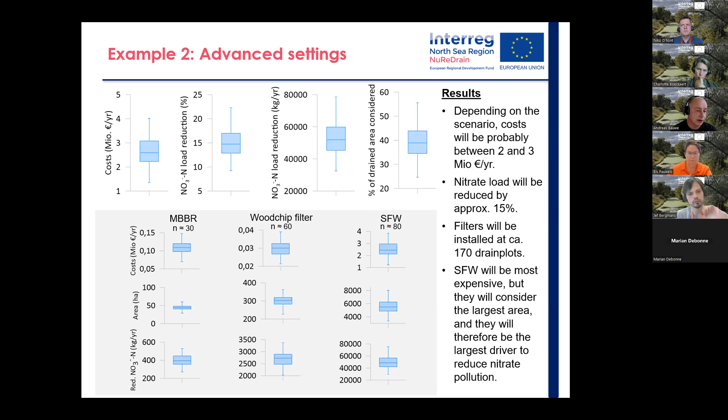Okay, I have a last example how to visualize the data. Let's say we want to implement the constructed wetlands at drain plots with a nitrogen load of more than 15 kilograms nitrogen per hectare, and in drain plots that are larger than 10 hectares. The boundary conditions are again annual discharge of 80 to 150 millimeters per year, and nitrogen concentrations between 3 and 15 milligrams per liter.

Let's say the performance of the constructed wetlands is 50%, and the cost is €30 per kilogram nitrogen reduction. The aim of this example was to visualize the drain plots that all fulfill the criteria and to visualize the expected costs. And here you see the result.

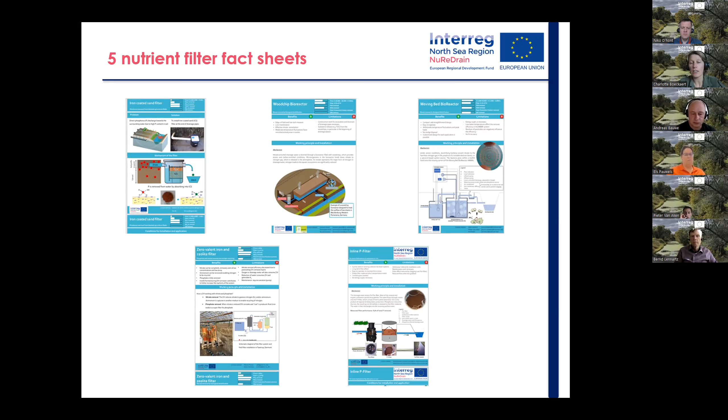Now, all of our project results are gathered in several outputs. We have created project videos. So if you want to learn more about the different field cases, different filter systems, then take a look at our different project videos. We also created fact sheets. These are 2-pager documents which describe the working principle of the filters and the advantages and the disadvantages. So also take a look at that. There is a do-it-yourself MBBR construction manual. It explains the working principles of an MBBR. There's a dimensioning tool with it, and there's also a guide which tells you step by step how you should start building a do-it-yourself MBBR.

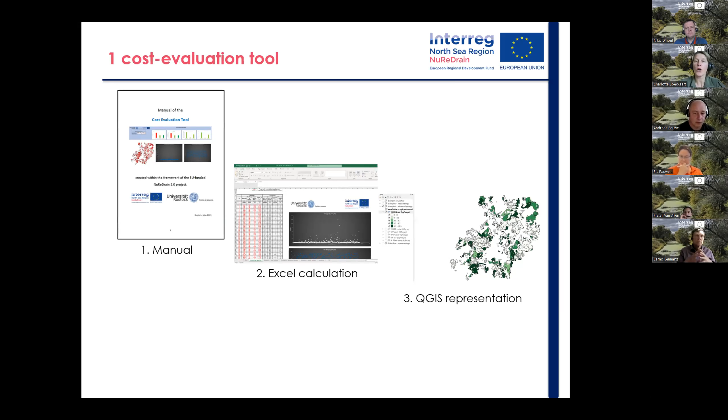Then there is a cost evaluation tool, as Andreas explained. This will tell you for a catchment which systems could be installed at nutrient hotspots and what would be the corresponding investment cost. You can also do what-if analysis, so you can really set your own boundaries to find out where you should invest at first. Then there is also a P-filter material regeneration tool. So Jef explained to you: if you want to find out for yourself if desorption of saturated P-filter material is useful, then apply the Excel sheets and find it out for yourself.

And then all of our results have also been described in scientific articles and in field case descriptions. So there's a lot to find out, and there's one single point to find it. That is our website. So please have a look if you need further information.

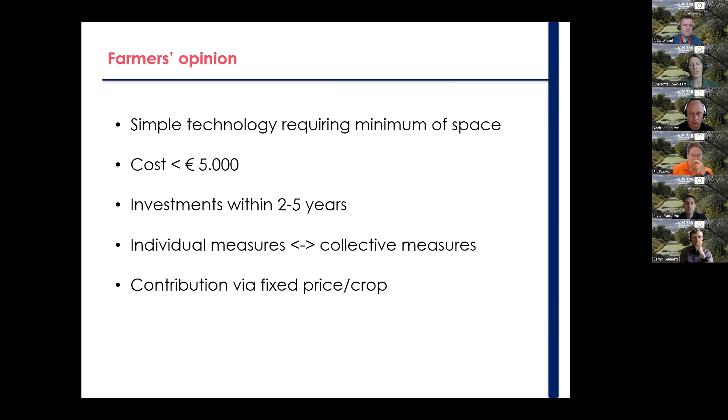Now, we also asked the farmers' opinion about our filters, and they confirmed that they are looking for a simple technology which requires not too much space. They are willing to invest in it, but of course it cannot be too costly. They agree with costs of something less than 5,000 euros. They are open to do investments within 2 to 5 years. Some farmers prefer individual measures, so they just want a filter system on their own parcels. Others prefer collective measures, so they would then combine different water streams and install one collective filter. And in the case of collective measures, they would like to contribute to the price for that collective measure based on a fixed price per crop.

Now, we have come to the end of the current NuReDrain project. We have not yet a follow-up project. We are, however, open to it. So if any of the participants would like to cooperate with us and has bright ideas, be my guest to contact us. But the focus for now is that we want to go to an implementation of the filters in practice. So to really have a replication of our field cases at many other locations across Europe.

And to stimulate this, as I explained, we looked for a suitable business model. And I'm very happy that the Flemish government in Belgium decided to support nutrient filter systems. So as of the 1st of June, farmers who invest in a filter system can receive 75% of public support coming from European means through the Common Agricultural Policy. So who will pay for it is somehow answered with this fact.

I'm very happy with the decision that was made in Flanders, and I hope it can be of inspiration also for other countries, so that we can, as a kind of social responsibility, strive for a better surface water quality.